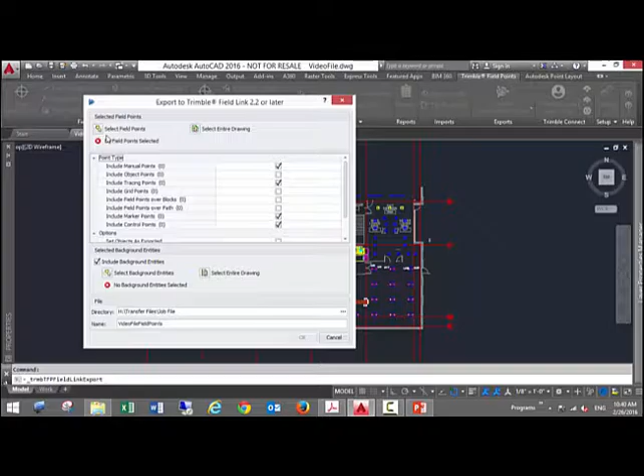And in this dialog box, the first thing that we want to do is select our points, or we can select an entire drawing of points or just manual points. I'm going to select some field points manually. So I'm going to click on the dialog box and do a window selection in this area here for my conduits. So I'll do a zoom out. Make sure that you have all the field points in view, because if not, they won't be selected. So we do those.

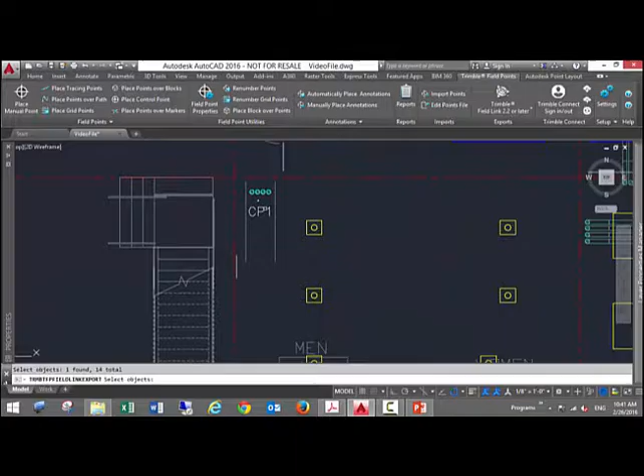And then I'm going to select my control point here, and I have another control point up above. So I have my two control points and my conduit hangers there. So I'm going to hit enter. I've selected 14 field points in total. I have some tracing points that are selected. So you want to look over at the point type and see which one has been selected, how many points have been selected, and then select the points that you want to export out.

Further down, scroll down a little bit if you're not open enough. The options for those points: do you want to set the points as exported? You can do that if you need. And then if you come back and export points again, you also have the option to include previously exported points if you did set them to be exported in an initial export. And then you want to ensure unique point numbers when possible, and typically you take care of that when you create your points. So you want to leave that checked there.

The next step down is select background entities. So here, do we want to include the CAD file that is associated with the drawing? So do you want to include background entities? Do you want to select individual background entities, or do you want to select the entire drawing? I'm going to select the entire drawing on this one. And then it will tell you how many entities were selected for the background.

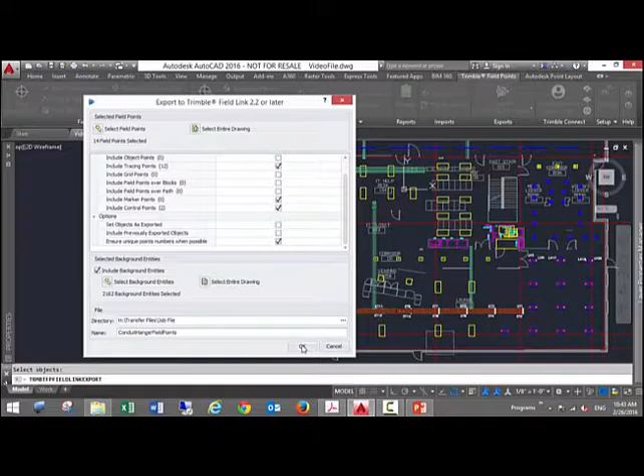So you want to give it a particular job file name to match the job file that is going to be out and laid out. We'll get a message saying export completed successfully. We'll hit OK, and then I'll bring up the location where those points were exported to. Here we have a TFL file. This is the Trimble Field Link job file. That is what we're going to open on the controller.

And then we have a DGNDB and a BLDG file. These are in reference to the background entities, so you want to make sure that you copy all 4 files over to the controller so you can open the job file with the points and then see the background entities.

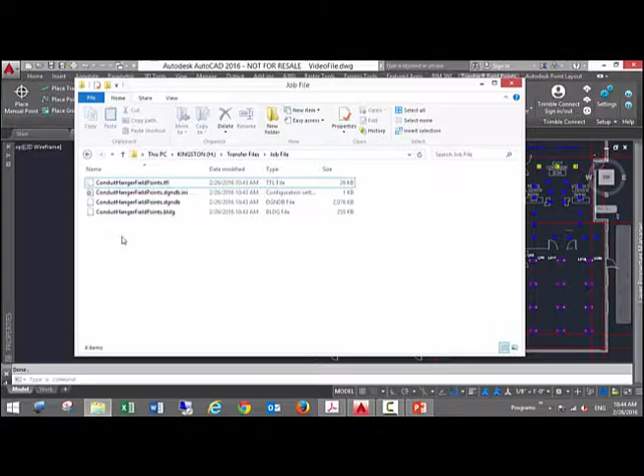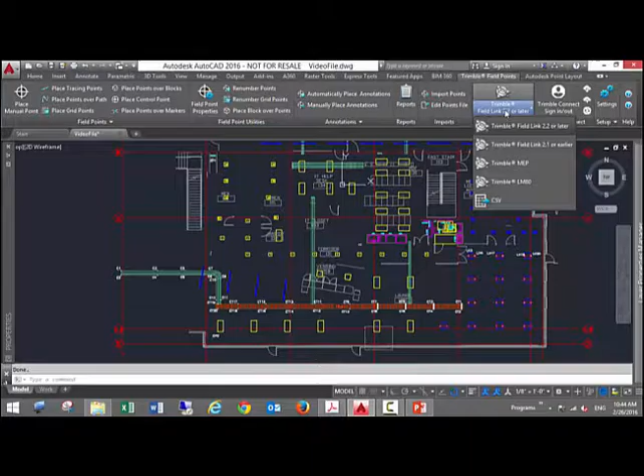All right, so now let's talk about the other option, which is the CSV export. This is used either for exporting to a non-Trimble controller, or to augment the job file you already have out in the field when your field layout personnel are asking you for additional points. So we'll use the CSV format. This dialog box is slightly different. First of all, it's the same on top, where we select the actual field points.

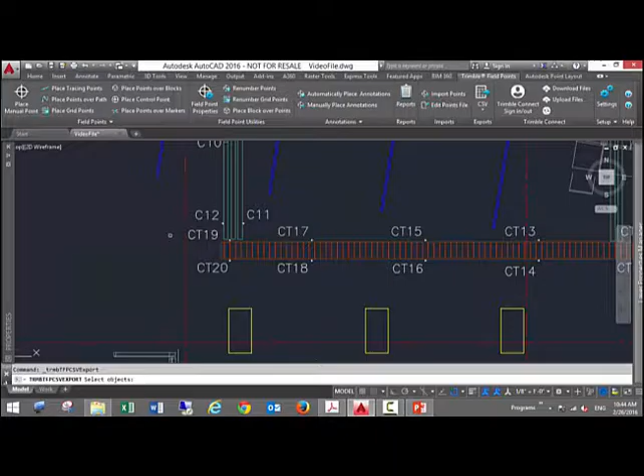So in this case, I'll select field points here, and I'll select additional ones here for my cable tray, all the way down the line. Once we select those points, it says it has selected 20 of them. We don't have to select the control points because I'm just going to add to the existing job file that I sent out earlier.

Then we ask, what are the options? The option here is format. We have 3 different ways to specify: point number, coordinates, and description. We can select north-east, Y X Z with description, or east-north, which gives us the point number, the X, the Y, the Z, and then the description. I'm going to specify the X, Y, Z. Make sure that whatever format you specify is the same format that is going to be imported into your controller. Then we have the same options we had before, which is set objects as exported.

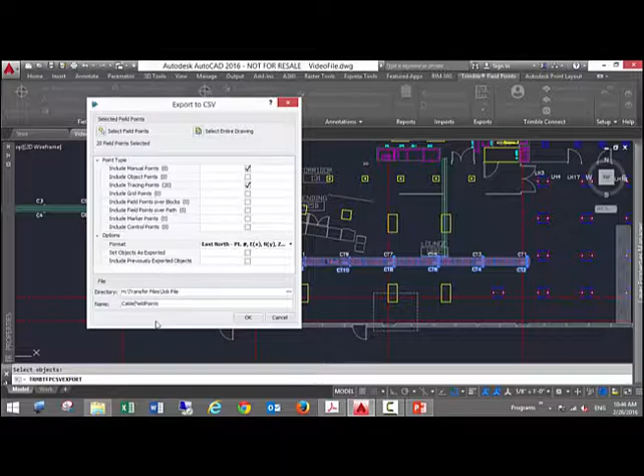Do we want to set the points as exported? Do you want to include previously exported points? In this case, we didn't select any, so we don't have to worry about that checkbox. We specify the directory where we want to save the points. It remembers the last place you saved the points to. And here, we're going to rename these to cable tray field points, and I'll hit OK.

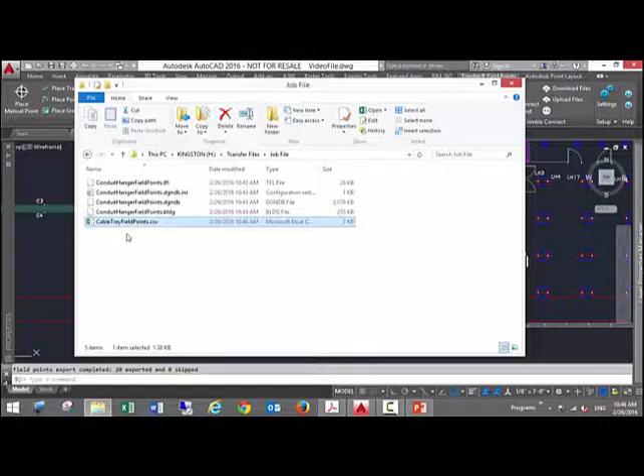The export is fairly quick since it's only the points we're exporting. Completed successfully. And now when we go to our job location folder, you see that there is a CSV file with cable tray field points. Now if you are exporting a CSV file, the attribute information of the points will not carry over to the Trimble controller.